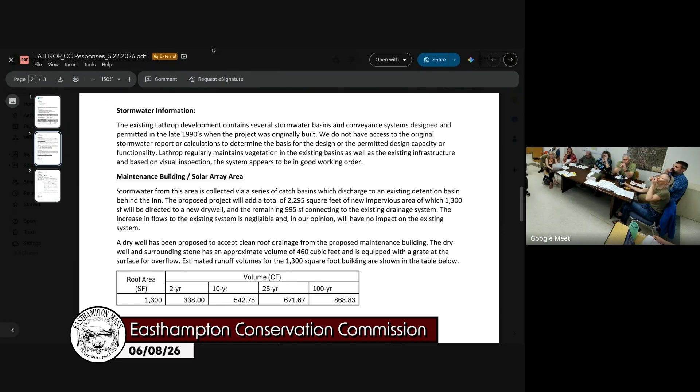And so what we did in follow up to this was then further analyze the amount of additional water that was coming off of that, a result of that 1,000 square feet. How does that impact the existing system? We had to delve into that specific drainage area, parse apart all the old reports, try to compare what was permitted then, what was permitted now, how to compare the two. And so the original reports and stormwater designs were to the 25-year storm. Today's standards are to the 100. So it seemed appropriate to compare at least the 25-year storm as best we could to the previous conditions.

This is speaking to the specific drainage area, this SC1 that you see there is the specific drainage area that encompasses where the maintenance building is, where that solar work is. And so what we tried to do is add 1,000 square feet of additional impervious area to that system and try to compare it as best we could. I forget what the additional was, it was about 1/10 of a CFS within the 25-year period.

That basin discharges overflow currently. So it was designed to attenuate and handle the 25-year storm. Anything beyond there was designed to overflow. This adds 1/10 of a cubic foot in the 25-year storm, which again, given that, and then going back, the larger drainage analysis for this was a pre and post of the overall project. So when you compare, if you scroll up, maybe it's further down.

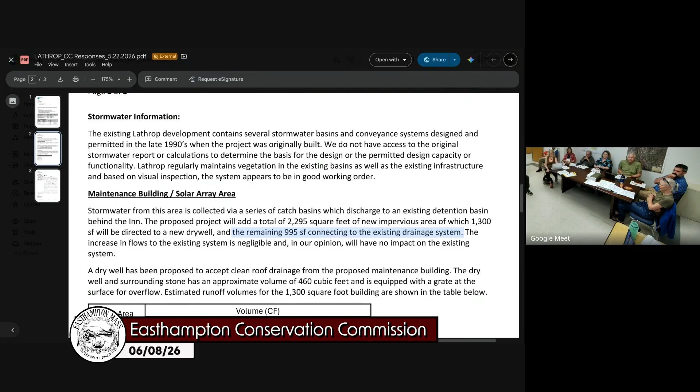So in that dry well, what storms does that handle? It handles the 2-year storm. I mean, they're not enormous dry wells. We're trying to attenuate for the peak flows. And so it deals with some capacity during that first flush during those initial storms. But just like any of the other basins, I think some of them, even in a 10-year storm, overflow as they're currently designed. They're designed to manage the outflows from those basins. And so this is simply overflowing in a much more controlled environment than trying to pipe it to a larger system and impact those flows.

So I guess we're talking right now about the part of the site with the canopies, with the maintenance garage, with the dumpster pad relocation. Yes. Right. And when it does overflow, then the water is just gonna go overland to the resource area at that spot. Right. Yeah, it's all going to be vegetated. It'll be a small overflow rate at the surface, but it'll just flow overland through vegetated surfaces.

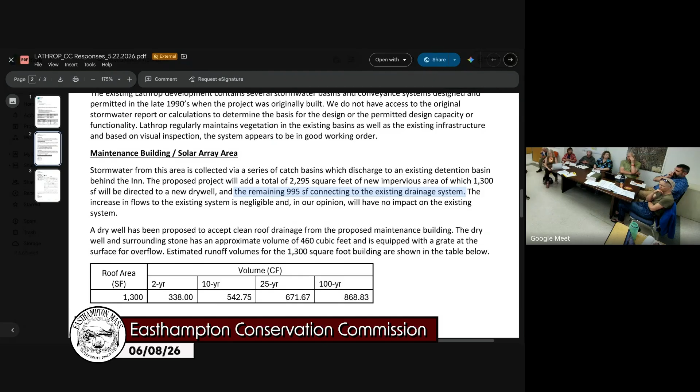And what part of that, is the parking lot going to the dry well? No, that's just the clean roof water. We tried to take the roof water offline in both instances, and that's why the two dry wells. The other location is a little bit different scope, but it was actually a reduction in impervious area going to the existing system on that site. Yeah, so the parking is expanding a little bit. It's gonna have a canopy over it. And so the increase in impervious cover has the solar canopy over it.

And then the roof leaders from that go to the dry well. No, from the solar they go to the existing system. Oh, from the solar. It's cleaner in that it doesn't have to flow over the parking lot. So the 1,000 feet of new impervious from the solar canopy over the parking lot is the piece that's tying into the existing system that Jeff analyzed to determine if it was capable of handling the additional 1,000 feet of new impervious area. The dry well is just for the roof leaders on the maintenance building nearby.

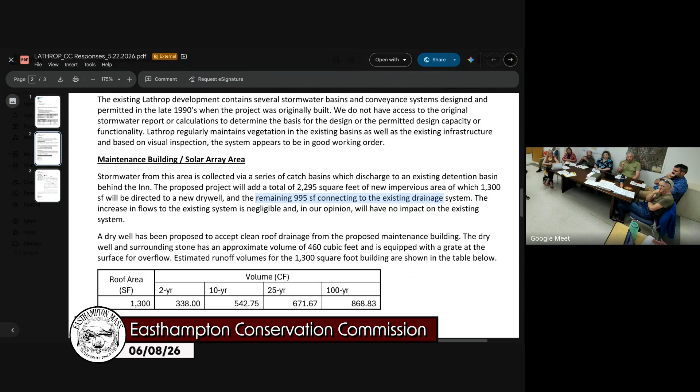So what about the 3 parking spots? Those will be covered by the solar canopy. So all that is effectively clean roof water also. We just don't have the capacity to infiltrate that on the site anywhere. Before we keep going on the dry wells, because this project has multiple components, are there any questions or concerns about the tie-in to the existing stormwater system? Go back up to the table.

Did you do these calculations? Which ones? These? Well, so these, the capacity of the existing system, how? So we took those numbers from the original stormwater report. So we tried to input at least the surface areas, the coverages, the rainfall amounts from the previous model, because we just had a PDF version, inputted those numbers into a current HydroCAD version. And then ran our calculations based on that, comparisons based on that.

The pre-development and post-development labels here are pre and post 1996 development. 1996, yes. So only the bottom here speaks to the new condition. Correct. Right. Yeah, and this was just again the eastern wetlands. So this broke it up a little bit differently in a post-development condition, because it was various drainage boundaries, drainage sheds, but the top two lines were the pre and post to that eastern wetland, which was the ultimate analysis point. And then that's what we were comparing. That was the closest, ultimate.

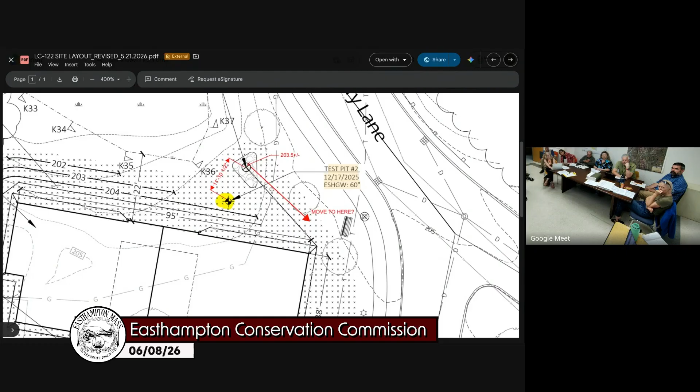So this is the test pit log for the one test pit we have information for. We'll pull up the sheet that shows its location. So it's over by the duplex. It's in the yellow right here, and that's from December 17th of 2025. And Jeff, am I correct in saying that's at the same contour line? It is the same contour line. Yep. And it shows estimated seasonal high groundwater at 60 inches. And do we have a detail on the dry wells? The dry wells are 4 feet, 4 inches. So we would have less than a foot of clearance.

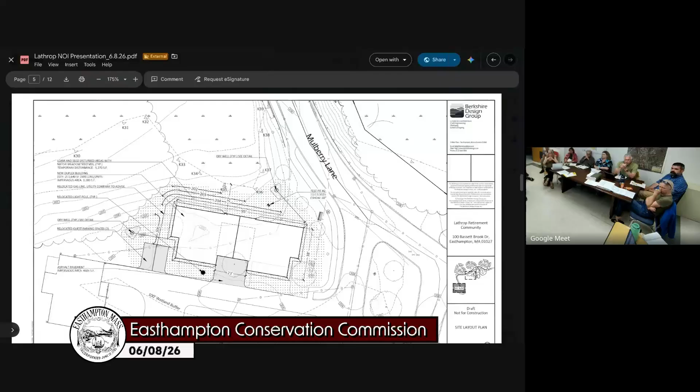Right. And admittedly, as we scrambled to get this in as fast as we could because of the solar piece, we were racing around trying to collect soils information, research what we had available, dig new holes, orchestrate this whole thing. So admittedly, that is a little low. We can certainly move it up gradient and pick up another 18 inches in that location, or put it out on the other side. To the east of the building is sort of the high point, but there are certainly locations where we could modify the dry well detail. That's something that we can easily adjust. But I would prefer to move it uphill and keep that detail; that would seem the way to achieve it.

So are we looking at this now though, because that test pit is at the same contour level as? No, this is just the only piece of data, the only test pit information we have. So what's the relationship with this test pit and the solar? None. No, this is just this location.

So I will say we've gone around this a couple times in the last 3 weeks since the last Conservation Commission meeting. My understanding is that this Conservation Commission wants a test pit at the location for each of the stormwater features where we expect to infiltrate. Easthampton has notoriously had a lot of trouble with infiltration. We've had a lot of perched groundwater. We've had layers of clay hiding underneath layers of permeable soils.

And this commission has now made it a practice to require an abundance of test pits so that we have enough information to know that when we build an infiltration feature, it will actually infiltrate. So we're not doing amended order after amended order, moving our infiltration features around, redesigning them, these projects dragging on for years.

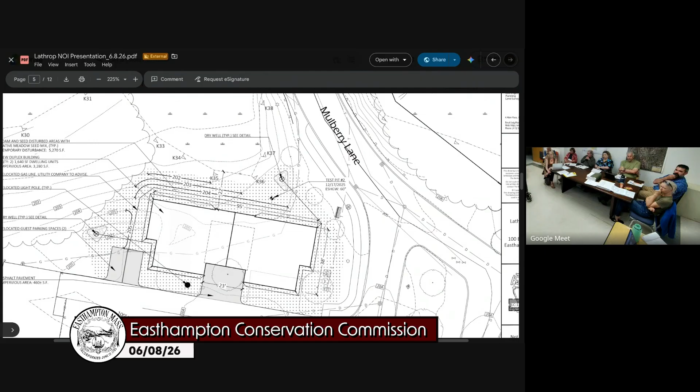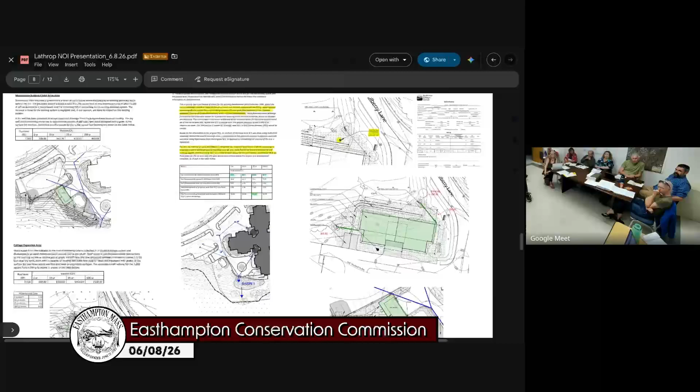Well, one of the exhibits we put together in that presentation looked at what it would take to design this cottage project. Again, these are 2 single-story, single family homes effectively, part of a complex. When you look at how this area of the complex is laid out, it looked like there was intended to have been a building here at one point. Right. It just wasn't constructed. But even though this is less than the threshold for our stormwater management permit, it's part of the larger common plan of development, even though it's occurring at a different time.

Absolutely. Our goal was to minimize the impacts to the existing system, trying to reduce the flows, the impervious areas, the bad water going to the current system. With the solar project, it was at least clean water we're putting in there. This particular location has 5 surface parking spaces that drain to the existing system. All the rest is lawn or vegetation. We're creating 4 spaces, and all the roof water was being infiltrated.

In terms of the larger development, that was without going back and having to redesign and re-engineer the stormwater system and bring it all up to current standards. The way we typically handle redevelopment projects is to minimize those impacts and localize the stormwater management to the best extent possible. But this isn't redevelopment. No. This is new development that was not included in the original master plan, so it needs to meet current stormwater management standards. So this would put the belt and suspenders on.

This is a subsurface stormwater system, Cultec chambers with a treatment chamber, overflows, pipe connections to all the roof gutters. It still overflows in the 50. That's just the way stormwater systems are designed. They're designed to attenuate peak flows. And so this is a whole system that is upwards of, I don't know, what did I say, 75 grand or so? 55 to 75.

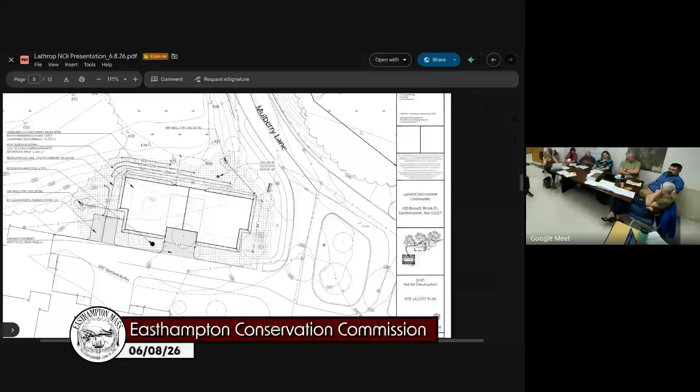Yeah. More likely to get screwed up with junk over time, you know, sediment, stuff like that. Harder to maintain. I suppose where the gutters and downspouts empty, a splash box or something to direct it. There's a little bit more management, but certainly another way to deal with it.

Let's go back to the question of whether we would be willing to entertain conditions for the missing soils information. Because if that's a no, then we're coming back for another meeting anyways. And I definitely don't think we've ever done that. I'm not sure if it's a precedent we would want to set. Yeah, I don't think we've done that before. Some commissions do that though.

One note I will say: I do think if just the solar canopy and the removal of the maintenance building had come in front of the commission before the wetlands ordinance had been passed, on its own, it would have been reviewed as an RDA, based on the extent of buffer zone impact. So if that helps frame our thinking, I think that's a relevant piece of information to hold. Is that because of just proximity to wetlands or overall work? It's farther from the resource area.

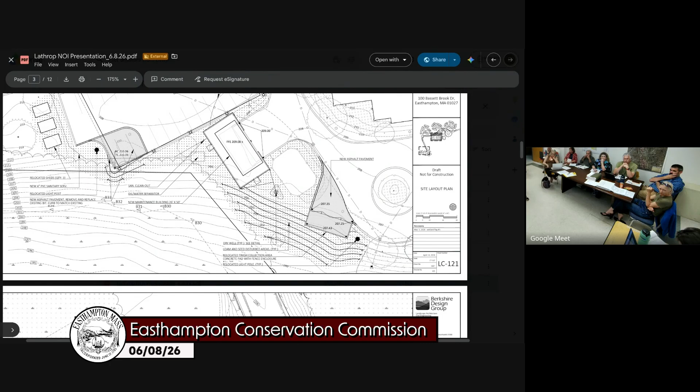Then we don't do the dry well. We don't have to get test pit information. And we don't build the duplex. How do the other commissioners feel about that? So how far away is our maintenance garage to our wetland? What's that distance there, Jeff? What's the scale? 75 feet. 50 feet, I would say, based on where the 100-foot buffer is. Oh, here, yeah. So maybe it's just inside the 50, 45.

If the building inspector tries to make you put gutters on the building, just tell them the Conservation Commission says you can't do it. What if we require an additional vegetative buffer planting? I was going to say, we still have the problem of the trees coming down. I know. And so I think if we coupled this with some additional plantings in the buffer, that would be okay. And when the trees come down, will the stumps be pulled? No. Okay.

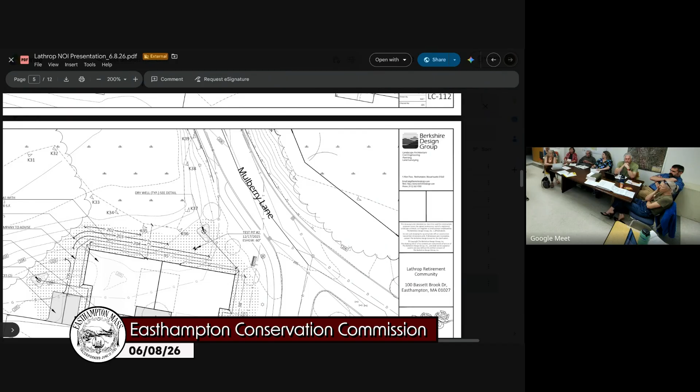So we could get some new trees in here over by the maintenance garage, and we need this area that's currently regrowing as a wet meadow. We could do plantings in that resource area if the commission wants to. That's the area that's been mowed. This wetland right here has been mowed until April of this year when we had our site visit. Yes, to me, that's a separate thing. I'm more concerned about the trees helping the wetland that's going to be affected by this, the localized wetland. Hoping it functions better.

So I do think we could require a vegetation restoration plan, including probably 1-to-1 or more for each tree coming down, planted in that wetland and in the adjacent buffer area, which could serve the dual purpose of restoring eventual mature overstory to the resource area, as well as adding an additional buffer area, because I believe some of this on the back here is currently mowed, right? Some of the back where the maintenance garage is.

Yes. I'm not sure that it's actually being mowed. I think it's just wear and tear, people walking through there behind the chillers. There's a little picnic table out there. Yeah, I'm not sure that they're mowing. But knowing that our water is going to be sheet flowing down these contour lines from the maintenance garage, we could condition a restoration plan, a revegetation plan for that area to act as essentially a vegetative filter strip.

Yeah, that'll be way better stormwater-wise than the dry well. I think that's a path, rather than waiting for our dry well to be a point source discharge. I'm actually more concerned about the loss of the trees taking up water than the additional flow, or the combination of the two. I want to consider the use of signage, like conservation area, no mowing or whatever. Yeah, it's pretty common.

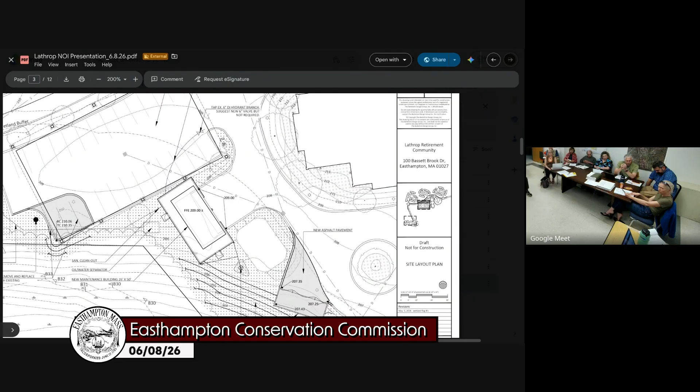Duplex comes out of the NOI, so we don't have to deal with that. No mowing signage to make it clear that this area is not to be further disturbed. The dry wells are coming out. I guess it's just the one that's shown, but that goes away. Did I miss something? So just to clarify, we are allowing the tie-in to the existing stormwater system. Yes. Okay. So no mowing signage, there's gonna be no gutters on the maintenance building, we're gonna revegetate the buffer.

I'll get out there this week to figure out what square footage we're looking for that buffer area to be revegetated, and then Jeff, probably you and me should meet out there so we can map out what that looks like, so I can understand where the maintenance guys have to get behind and stuff like that, just so I understand the usage of it.

And then we want 1-to-1 mitigation plantings for the trees removed, all in this system. So some of those will be in the buffer, but probably not all of them, because I don't think this buffer area is going to be that large. And it's over 20 trees, quite a few trees. Yeah, but somewhere in this existing wetland system, those trees will be replaced. And then within this vegetated buffer, I'd like to see some understory plants as well. Yeah.

So then we would have these all as pre-construction conditions. We would have a tree planting plan overall as a pre-construction condition, so where you're gonna plant them, what you're gonna plant, DBH, et cetera. And then we would have your plan for the buffer zone restoration area for our vegetative filter strip. I think we'll call it that because I don't want it to get confused in the future whenever we talk about restoration in terms of the act. So for our vegetative filter strip we will want your plant list. Some of those one-to-one planting trees could go in there.

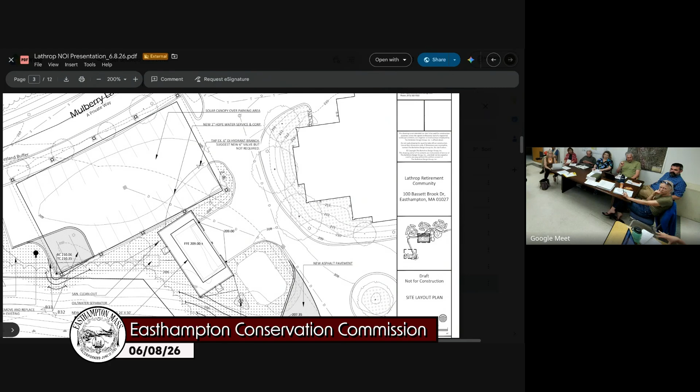And you guys will see the order of conditions at the next meeting. We'll review them entirely, but I will be able to communicate to the planning board that we will have issued an order of conditions for this section. However, because there are so many moving pieces, I want the commission to be able to review the actual special conditions with me at the next meeting, and then it will be issued on the 23rd. They're going to vote on it tonight. You'll have your order in hand on the 23rd.

All the conditions that we discussed in one shot, or? Yeah, I think I want you to enumerate which parts of the application we're including and what we're not including. Does that make sense? A little bit. So we want to be clear in the motion that we're pulling out what's been struck. I move that we authorize the solar roof and the... Have to issue an order of conditions. It should, yeah, should be a motion to issue an order of conditions. No, first we have to close the public hearing.

Oh, we never do that. No, we never. Great, let's do that. All right, thank you. May we have a motion to close the public hearing? Second. All those in favor? Aye. So moved.

There's specific deadlines for each. Right, there's 3 dates in the order: date of receipt, date close public hearing, date order of conditions issued. So there's deadlines. Yes, now that they have motioned to close the public hearing, before they even vote on the order of conditions, I have 3 weeks from that date to issue your order of conditions. How many times have you watched us not do that, Mark? I don't see anything.

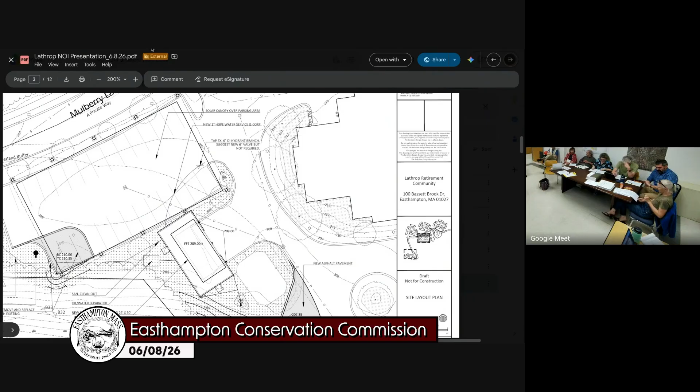All right. Next item is a request for determination of applicability for detached garage construction at 12 Plum Brook Drive, map 146, lot 75, filed by Todd Alexander on behalf of Stephen Gross. And I know Todd is online, I'm hoping he's still with us. And owners are here in the back. And I just want to say to all of you, thank you for your patience through that hearing. Todd, go ahead and introduce your project.

All right, so we're proposing to build a detached garage at Plum Brook Drive. The dimensions are proposed 24 by 36, and the garage is parallel with Plum Brook. Currently the area is lawn, and it's proposed to be lawn area after the completion of the project. There is a stockpiled topsoil pile from the original house construction that we're going to relocate as part of the garage construction project, and then revegetate those areas with grass.

So, yeah, I see you're in the minor activities section. We did go ahead and take a look at the site today. That was my question as well, whether the commission believes this is an activity accessory to the conversion of lawn to use as accessory to residential structures such as decks, sheds, patios, pools, and placement of basement bulkheads. We are more than 50 feet from the mean annual high water line of bank and from bordering vegetated wetland.

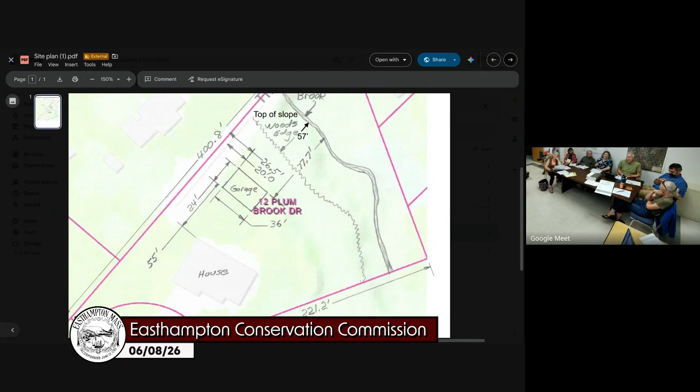I was curious about that pile. I think the pile will be addressed during this project. Yeah, they have to move part of it, not all of it. That's my loam pile from when the lot was stripped to put the foundation in, to spread on the yard. It's only been 13 years. So you said you're gonna spread it on the whole backyard though, correct? And front of the yard, yeah. In front yard, okay.

Which pile are you? Well, it's under all those shrubs and vegetation. Okay. It's in there somewhere. That's my loam pile. There's a better picture in one of the earlier photos, the aerial photo that showed it more clearly. Oh, there we go. There could be pictures in there, yes. You can kind of see what the pile looks like without the vegetation on it. Oh, I didn't realize it was so long. Wow. It's very long, yeah. That's good to me.

So we'd be looking at the usual conditions of 48-hour construction notice and appropriate erosion control. That's if we're going negative determination, type 3, not 5 for the exemption. Right. I do think it's worth conditioning some erosion controls in here because it sounds like it's gonna be a multi-month project. Let's do type 3 so we can put those silt fence and straw wattles in. And then have the condition for allowing 10 feet to revegetate along the wood line. Right.

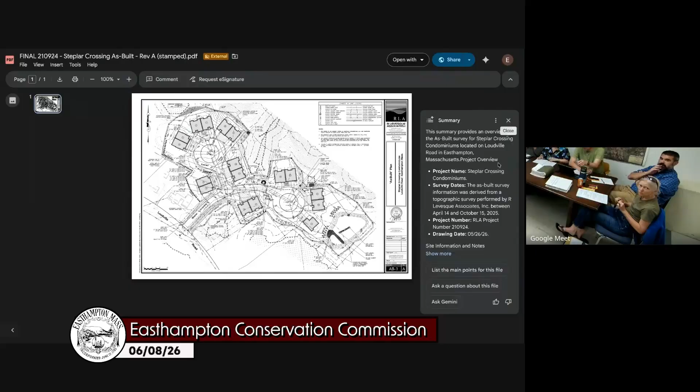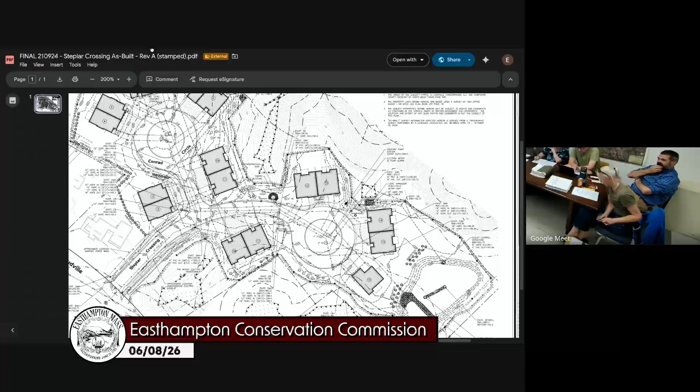All right, moving on. Request for certificates of compliance. Are we speaking about 6973 Loudville tonight? We are. And we do still have Cole Modestow online, who's here to speak for that. Again, Cole, thank you for your patience. So this is 6973 Loudville Road, Mass DEP file number 1510309. And I'll turn it over to you, Cole.

Sure. Thanks for having me tonight, guys. My name's Cole Modestow from R. Levesque Associates. We're representing the client for this project. I guess everyone's very familiar with this project, and as far as the letter that was issued, it has been received and addressed. What you're looking at is the revised as-built.

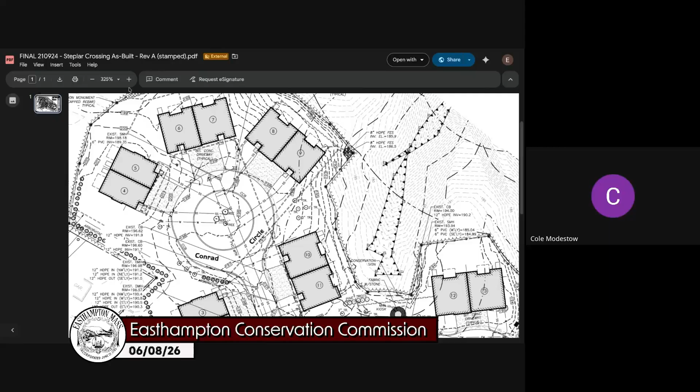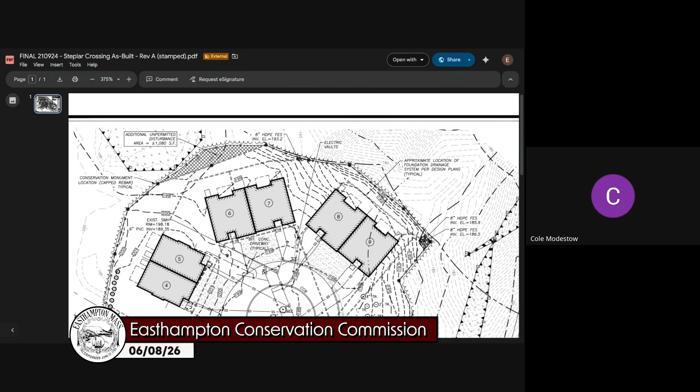The two areas in question here that have been revised are this northwesterly side, down on the plan bottom left here. That limit of work has been expanded and addressed on the as-built with the capped rebar, and the northerly most portion, which is arguably the more important part here, has been denoted as the unpermitted disturbance area. It has been remarked and shown on the plan. And we recognize the need to restore it, and we have every intention of doing so.

And I will say that... Sorry, what was that? We didn't hear that last bit, Cole. Can you repeat? Oh, no, I was just trying to turn it back over.

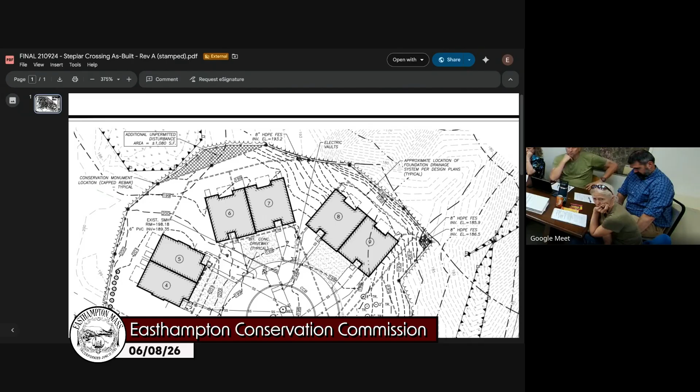Okay, great. So I have a letter as well from R. Levesque Associates, stating that they acknowledge that additional clearance will be restored under the special permit. They say that they don't anticipate this will hold up a COC per our previous conversations. We have spoken with the developer this morning. They're aware the restoration work will need to take place, and they have put it in writing that this restoration work, beyond the permitted limit of work, will need to take place.

I issued the letter that the commission reviewed at the last meeting, and I delivered a hard copy to every unit on site. Cheaper than mailing, I just took a walk around and hand delivered them to the units. And the president of the HOA has it in hand; she has it in her emails. I do believe that the unit owners will be made aware of this.

I think the language in here is fairly clear and firm that the commission, the city, expects that back area to be restored in alignment with their special permit, which is considered a part of Easthampton zoning law. So we have taken it as far as we can take it, and we are not holding up the COC for it at this time. Great. Sounds good. So we're ready to issue that.

Oh, the only other thing, Cole, that I would like is a hard copy of the corrected as-built. I'd like a 24x36 copy for our records. Yeah, totally. I can have that brought in tomorrow. Great.

So we are looking to issue a complete certification that the work has been satisfactorily completed with ongoing conditions that are numbered 63 to 70. Would folks like me to review what those are, or have you had a chance to take a look at the ongoing conditions already? Yeah. I feel like we've probably talked about them over the last 2 years, quite a bit. Too good to be true.

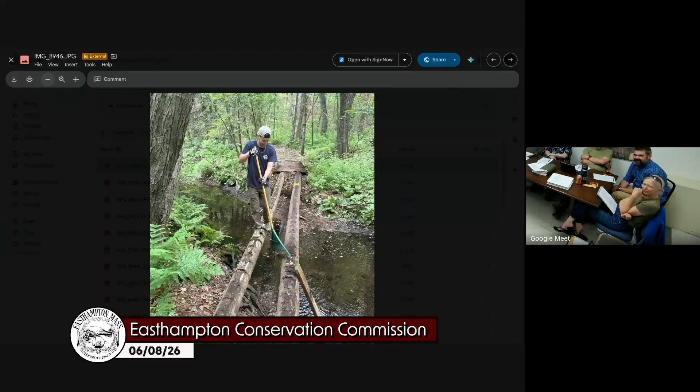Here we've got some cyclist kids carrying stuff out. They were all racing the next day, so they were stopping to eat bananas and properly hydrate. It's pretty awesome. And here's what was underneath the bridge. Installed 26 years ago, we learned the bridge was installed by Rich Lombard in 2000 on these old telephone poles. And the determination was that the telephone poles, because of God only knows what they treat them with, remain sturdy. Yep. With a little bit of bounce, right? Yep. Polycyclic aromatic hydrocarbons. There we are.

That is Al. Al was kind of our team lead who organized a lot of the young people to come out here. This is another cyclist. A neighbor came by with her dog and saw us lugging lumber out and said, "Hey, that's so cool. I work for a catering company. I have a tray of tiramisu in my house. Can I bring it out for you guys?" Yes. Decidedly. Yes. So there's the tiramisu. I'm extra sad that I missed it.

And this gives you a sense, this is only maybe a quarter of the lumber we hauled down, but here's the bridge in process. There were a lot of kids there. Yeah, so you can really see it's just a real mix. Some Boy Scouts came out and joined us. Here's some kids working on it. They had a whole assembly line going, placing them, drilling them. It's awesome.

I took these photos for you, Julie, just while we were down there. This is where we're going to install. Yeah, we'll have to talk a little bit more about what exactly you're looking for in here. Here we are under the bridge.

That's Keith. Keith's an alum of Al's cyclocross program. He lives in Connecticut now. He never rides these trails, but he just came up to help for the day. Really great. These two boys had so much fun destroying the old bridge. They seemed like they were just having the time of their life.

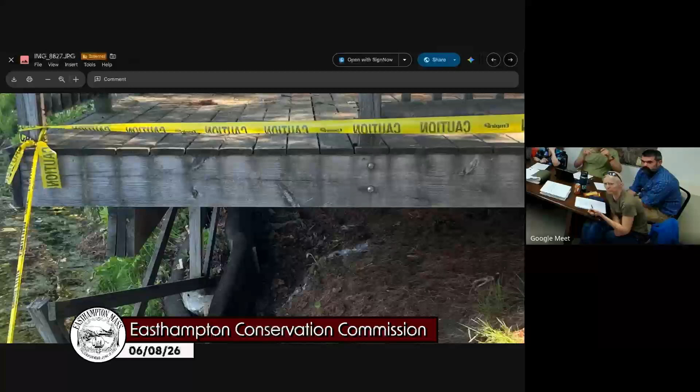A couple RDA updates, just really fast. We got another Arcadia Manhan quarterly update. Excellent. It was kind of a tough moment as that was all going down, but I think it really did result in reducing usage of the site. I think NEF successfully closed the area. It's going to be a slow revegetation process, but it'll hopefully happen. And the fishing platform just started today. They're reinstalling it, with double wattles staked, trying to protect the pond from as much disturbance as possible. Good.

No minutes. Just the success of the wetlands ordinance I have to acknowledge. This is the first time I've seen all of you since we passed it, so thank you all for your work on it and for coming out to the meetings. We have the Easthampton Wetlands Ordinance. I know it's very exciting. Thank you for making this a reality.

Julie and I finalized the form. The form is posted on the website, right at the top of our Conservation Commission page. So is the fee schedule, and so is the text of the ordinance. The ordinance still doesn't have its sections correct, so I'm going to wait to give the rest of you a hard copy until it's actually in the city ordinances, so that we all have the same section references and page numbers. Any new applications we receive, we'll begin reviewing for applicability to the ordinance. Awesome.

Anything else? Make a motion to adjourn. Second. All those in favor?